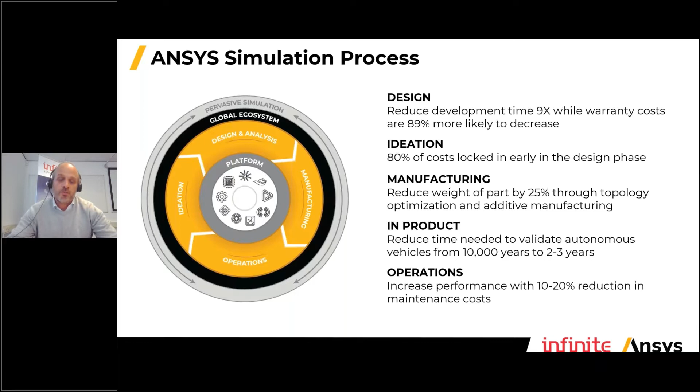Another nice trend to mention is at the very early stage of your product development process. Already in the conceptual phase, for instance, you can already start doing simulations. This is something that Ansys really pushes, to have a better understanding of what the results are at a very early stage of your product development. Most important in this whole approach is that we, as the Ansys partner in the Benelux, put your business goals in the center.

So how is this achieved? The setup of this platform of Ansys is shown here by the physics blocks. Most people in the industry know us for the fluids and structures simulation capabilities, but also on the electromagnetics, for instance.

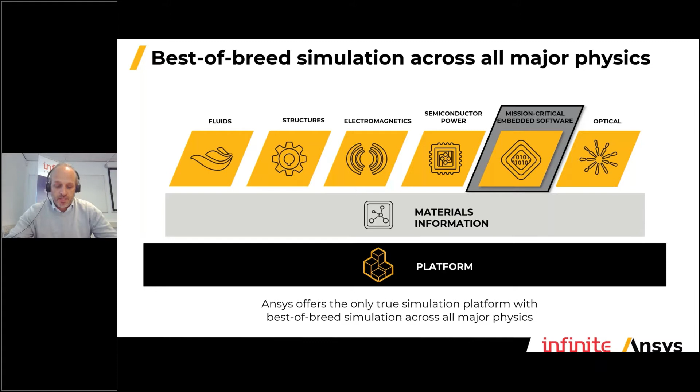One of the ones we're talking about today sits in the mission critical embedded software part. You see it highlighted here in the gray block. Within here, there is the Medini Analyze functionality, but we also have the SCADE functionality, which I'll emphasize in a minute.

So if we really talk about Ansys Medini, our colleagues from Ansys are going to talk about this in a minute and really take you in depth. Most important is that Ansys Medini Analyze streamlines your functional safety analysis across the entire system architecture, including electronics, down to your chip level. That's really important. Ansys Medini Analyze is a model-based integrated tool supporting safety analysis for safety critical electronic, but also electronic and software controlled systems.

It allows for consistent and efficient application of industry guidelines, specifically tailored for the industry, for various industries. I'm not going to go in detail, but this gives you an idea that Ansys Medini and the cybersecurity part can actually be used within these different industries with their different standards. Nikhil of Ansys will focus on this in a bit more detail in a minute.

So think about your business goals. What will happen if you're going to present your product? It's almost completely developed. But think about your business goals, like time to market, and the risk that you have within the complete development part.

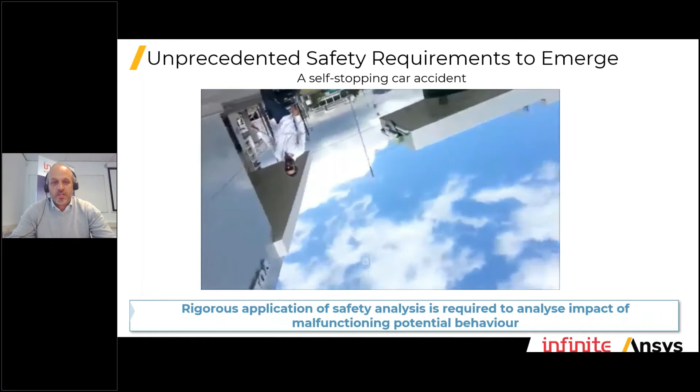Think about if something happens that you haven't seen before, like what you see in the screen here. That's a bit of an accident. So there's a huge impact within the team, of course, but also on your business development goals. This will throw you back and give you a huge delay to actually present your latest version of the product to the market.

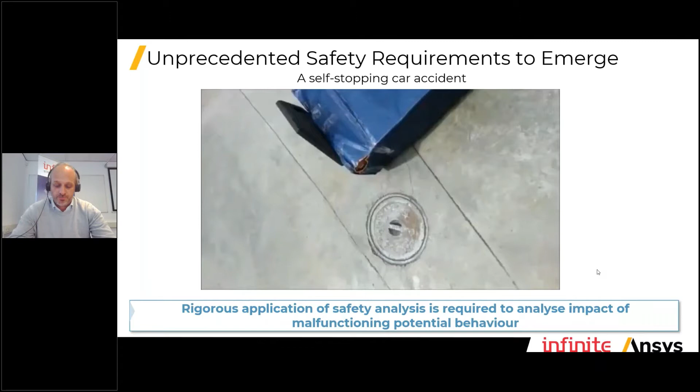Jeroen? Yeah, I'm a bit too fast, so just a second.

What I would like to show you at the end of the webinar is the top 10 of 2020. So be patient, I will show you how it looks, and there's a major shift going on. We don't have the information of 2021, but that will be available next year, of course.

Okay, one second Jeroen. Yes, please. Yes, I would like to hand over to Nikhil Kelkar.

He is the System Business Unit Global Channel Sales Manager, and he will talk about what functional safety and cybersecurity can actually do for your industry, like automotive, aerospace, and industry. Nikhil, it's up to you.

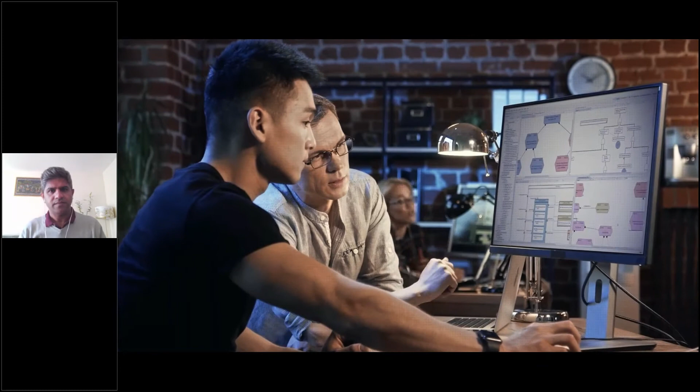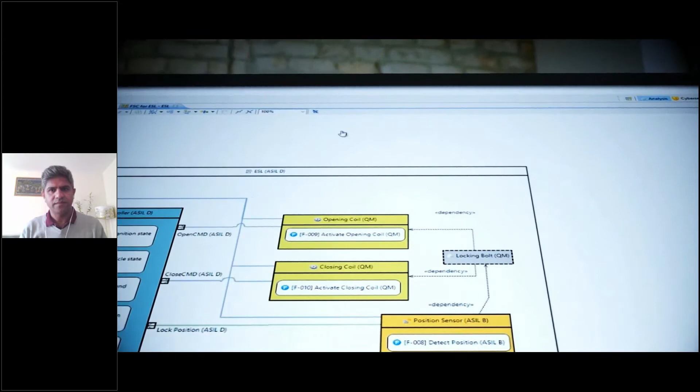Ansys Medini Analyze. For functional safety analysis, engineers across multiple industries trust Ansys Medini Analyze for analysis at the concept, system, software, hardware, and even chip levels. All of your key safety analysis methods, all in a single integrated tool.

Analyze different aspects of functional safety, define solutions, and ensure compliance to ISO 26262, IEC 61508, and others. To satisfy emerging safety standards, such as SOTIF and UL 4600, Ansys Medini Analyze identifies and addresses performance shortfalls that occur even in the absence of a system failure, so that design and performance both succeed in cases that go beyond functional safety analysis.

Complex electronics are also vulnerable to cyber attacks. Increased software and connectivity opens the door for hackers, who gain more opportunities to infiltrate systems. Ansys Medini Analyze addresses system-level security to uncover and eliminate your weak spots, so your entire electronics architecture remains impervious to outside attacks.

For leading electronic systems in automotive, aerospace, rail, and many more safety-critical industries, get ahead of the compliance curve. Streamline your analysis efforts. Accelerate time to market. And deliver unmatched safety and security with Ansys Medini Analyze.

All right, so let me just go ahead into the next page. So as we talked about in the video, it was clearly mentioned that whatever analysis that you're doing currently can happen in one platform altogether. And that is what we are going to talk more about.

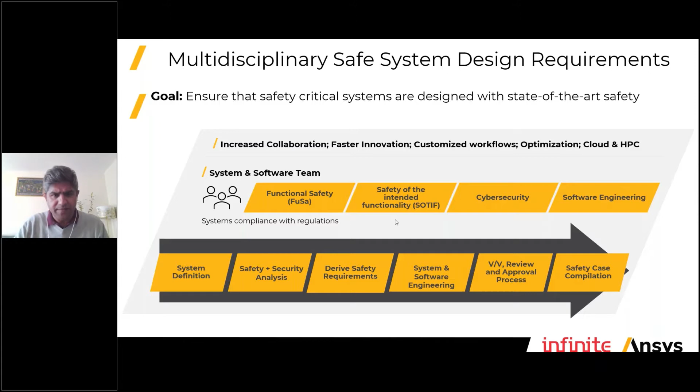Why functional safety? Currently, people are using point tools. Many customers are using Excel files, different products for doing their point analysis. Probably one customer is doing their HARA analysis into a different tool, and their FMEA analysis into another tool. However, because of that, there is a lot of manual workload on the customers, and also the traceability and the scalability becomes a big question mark.

So the customer goal usually becomes that they want to have a scalable and traceable software for doing their safety analysis with a lot of time saving, and are able to maintain and develop a supported solution. Ansys Medini provides a model-based approach wherein you can update your safety analysis after changing the system design or the system model, and it provides one platform for doing all your safety methodologies required by the safety standard.

Eventually, when you're using one platform at the same time, it saves a lot of time, because the reuse of work of the tool and also the guided safety management tool provided by Medini reduces a lot of time benefit for the customer. So eventually the customer comes out with a saving of up to 50% on their design flows and their model-based approach.

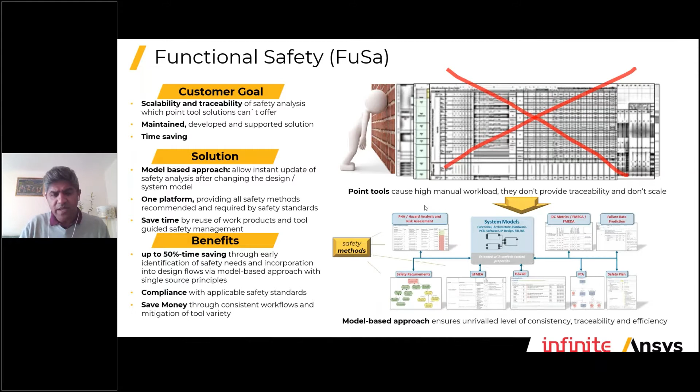Their system analyses are compliant to the safety standards that we provide, and eventually saving money for our customers. So that's where Ansys Medini will help our customers drive their functional safety analysis goals.

When you talk about software engineering, usually these analyses have to be implemented into the software engineering part, so that you can use those systems and design your software goals. In those scenarios, the customer needs to manage a lot of complexity with regards to the system software. And when you talk about automotive, they have to be compliant to ISO 26262 and AUTOSAR compliant.

In similar scenarios, when you're talking about other industry sectors, for example aerospace, these standards have to adhere to ARINC 661 or DO-178C, or the FACE standard, similarly for IEC 61508, and also eventually reducing their time to market. As I mentioned, with Ansys Medini's multidisciplinary system applications, you would be able to create automated code generation, and also verify the full model-based approach with no back-to-back testing.

So eventually saving a lot of time, confidence, and identifying the issues at a much better and faster stage that can be done by our customers. And there would be always a reduction in the cost of change. So these are the main reasons where customers look for software engineering with Ansys as well.

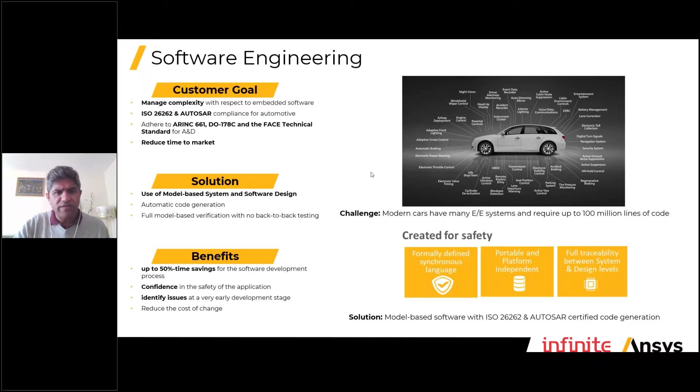When you talk about Ansys safety, we cater to multiple industries. Medini was predominantly a product resulting for ISO 26262 standard. Eventually, with a lot of development and customer support, we've been able to work into different industries. Currently, we support IEC 61508, ARP 4754A, MIL standards, ISO 21448, and the ISO 21434 standard for cybersecurity.

So if you're looking for a product collection, we have Ansys Medini Analyze, which is talking about the standard, complete standards. We also have a product for semiconductors, and Ansys Medini Analyze for cybersecurity is also part of our product collection.

So sorry about that. When we talk about functional safety standards, the generic standard which is derived for all other standards is IEC 61508, and from there functional safety requirements exist in each and every industry right now.

So if you're talking of electrical drives, the IEC standard is 61800-5-2, and Medini supports this standard. If you're looking into agricultural and forestry, where there are requirements for agricultural vehicles, ISO 25119 is a standard which is compliant for Medini as well. If you're coming from a medical devices industry, then you can do your Medini analysis for the IEC 60601 standard. So in a nutshell, we are able to support functional safety standards for multiple industries.

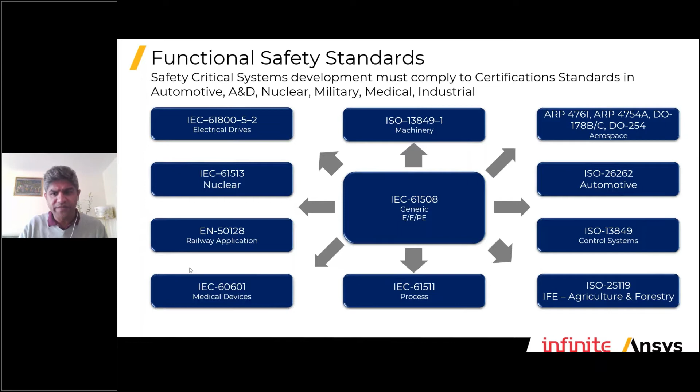And we can dig deeper with you guys if you have a specific standard that you want to work on, and we can look into this in detail. So when you're comparing - this slide was shared by Jeroen, and I want to get a bit deeper into it - we talk about how analysis can be compared across different standards and different domains.

So if you are working on ISO 26262, your risk graph, which is the HARA, the hazard and risk assessment, will be mentioned as HARA. But when you're talking into the ARP side, which is the aerospace domain, the same risk graph would be termed as FHA, and they would tie to the DAL standard, whereas in automotive it would tie to the ASIL standard.

Similarly, when you're talking about machineries, IEC 61508 or ISO 13849, this would come into the PHA standards, which talk about PL and SIL. Similarly, when we talk about FMEDA, it would relate to SPF. Here it talks about individual risk, and in IEC it would be talking about SFF.

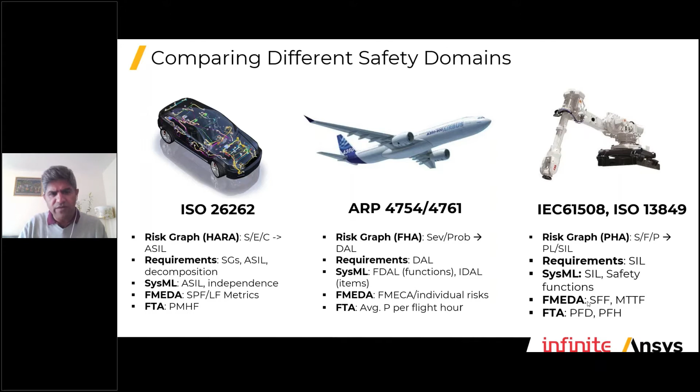So that is the comparison that we are going through, and we are able to answer our customers for analyzing into different industries.

I want to take you through an application example. Here I'm going to talk about in-vehicle systems, which is very close to the automotive side. However, it's going to answer a few of the questions that every customer is currently asking and wants answers for. So in this in-vehicle example, the first question my customers usually ask me is,

are all my safety analyses consistent and based on what's really implemented? That's one of the important questions. Then the second question that comes to their head is, what is the safety impact of malfunctions and failures in the systems and the components? And there are a few customers who also want to understand the impact on the semiconductor side of the overall vehicle or system safety. And they also want to look at what are the real world scenarios where there would be capabilities falling short.

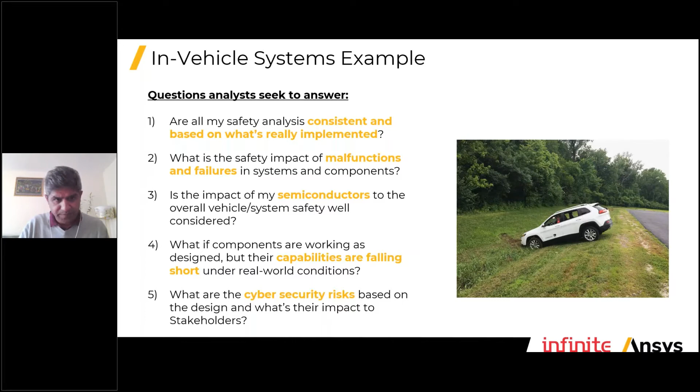And also the biggest topic right now is cybersecurity risk based on the design, so how it's going to impact our stakeholders. So to go much deeper into that...

To answer the first question, the customer is looking for what's really implemented, and for that the customer's goal is to have a multi-analysis methodology in a consistent manner, and to also have traceability and scalability of their safety analysis. And as I mentioned in my previous slides, Ansys's solution provides a model-based approach that will allow you instant update of your safety analysis even after changing the model design.

And it's also providing one platform, so you can do all your analysis starting from HARA, HAZOP, FMEA, FTA, and also your safety requirements. So it's a complete circle that we are able to cover with Medini Analyze, eventually reducing your time for product management. And the second question is usually, are our malfunctions and failures having an impact?

So to ensure that our electronic systems are providing consistent performance over time, and also how they can be maintained and developed into a supported solution, eventually reducing the time. The biggest aspect here becomes that if there are failures, there would be delays and time constraints.

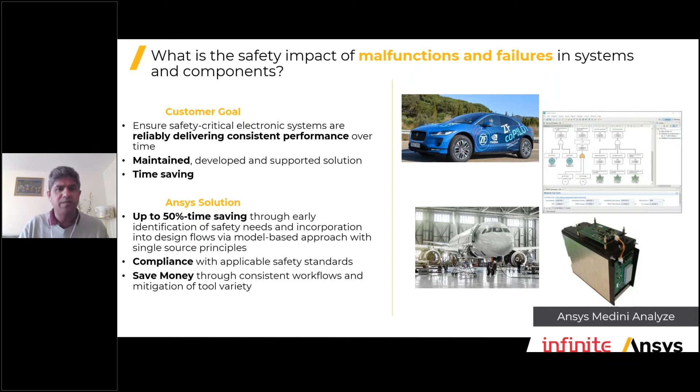As I mentioned, we allow up to 50% of time saving, and that's a customer number, through early identification of the safety needs, and incorporating those into your design flows via a model-based approach. We are compliant to the safety standards, talking from ISO to ARP side. The main result and benefit would be saving money with a consistent workflow, mitigating the tool variety. This is one of the reasons customers like ZF and Lithium Balance are using Medini.

There are customers who want to see an impact at the chip level, into the semiconductor design. In that scenario, the customer maps the semiconductor design to the functions that they support within the vehicle, which is of key importance. Eventually the semiconductor should perform flawlessly and have outstanding passenger safety. This is one of the requirements that comes across when talking at a chip level.

Our solution for that is to provide an analysis that can identify potential failure modes, and verify the functional safety at the chip level, at the semiconductor component level, and mitigate the impact of design weaknesses on day-to-day safe performance, overall providing a system analysis of the semiconductor side integrated in the car or in the system.

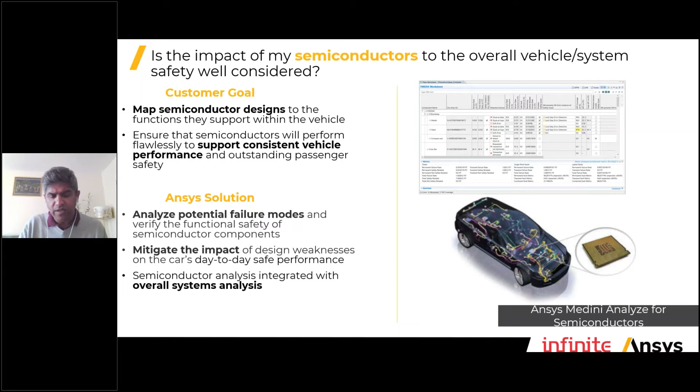There are also real-world scenarios which are a threat, and currently, as we move towards autonomy, we want those topics covered and considered when you talk about SOTIF, which is a bigger requirement for automotive currently. How we can identify those shortfalls and also mitigate those hazards in a nominal system for automated vehicles or for the sensors, in case.

It should also comply to the standard, which is still in the process of being standardized. So there is still time for us to do this, and Ansys currently is providing a solution that is able to do systematic identification of the SOTIF risk, as well as provide design limitations and triggering conditions. There is an efficient workflow that can be done on SOTIF and functional safety in a common environment.

We are trying to be leaders in complying with safety standards here when it comes to sensor deficiencies in adverse weathers, or deficiencies in driver performance. This is where Ansys Medini comes into picture as well.

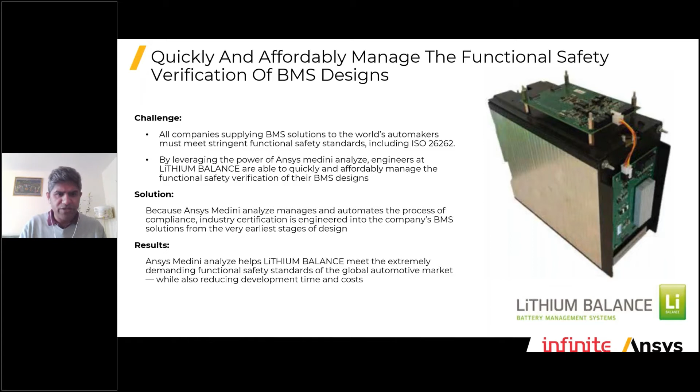A bit more detail about what Lithium Balance did for their BMS design: their challenge was that all companies supplying BMS solutions to world automakers have to be stringent toward functional safety standards, including ISO 26262. By leveraging Ansys Medini Analyze, Lithium Balance was able to quickly and affordably manage the verification of their BMS designs. This helped them meet extreme demands of functional safety standards required by the global automotive market, while also reducing development time and cost.

Similarly with ZF, I want to talk about cybersecurity. ZF uses our product for functional safety as well as cybersecurity analysis. Their challenge was to provide innovation and efficiency in their embedded system for the verification process. We provided the functional safety tool, and they were able to deliver ISO 26262 work products, reducing their functional safety analysis time by up to 50%. Currently they are applying cybersecurity analysis to their ADAS project, which is an ongoing process.

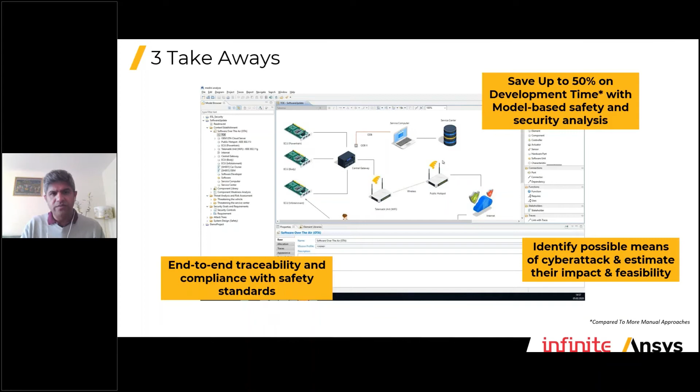The last three points on my slide are the takeaways for customers using Ansys. First, they get an end-to-end product solution that is easily traceable and compliant with safety standards. Second, it provides up to 50% reduction in development time through a model-based safety analytical method. Third, it helps customers identify cyber attacks and estimate their impact and feasibility in the long run. That's my final slide.

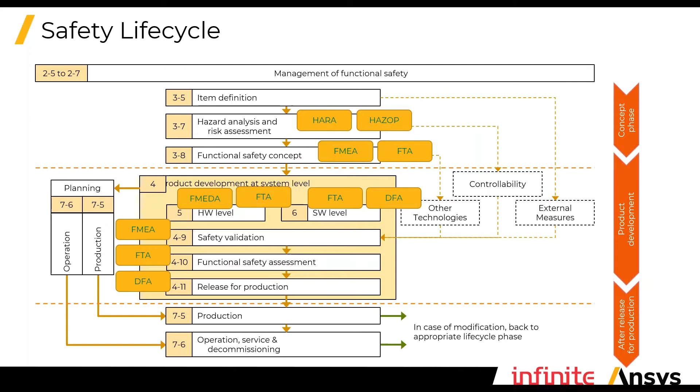As we mentioned, according to the ISO 26262, we have in Medini different work products. That means you don't need to change the tool. We have a work product or package to do the driving situation, hazard analysis and risk assessment, safety goal and safety requirement, functional safety concept and technical safety concept, and for the validation parts, we do support the FMEA, FMECA, for railway, industrial and aerospace, FMEDA, and the output of the FMEDA for automotive, where we need to calculate the single point fault and latent point fault. Of course, qualitative and quantitative fault tree analysis that we can support also in Medini, and dependent failure analysis that we can also support.

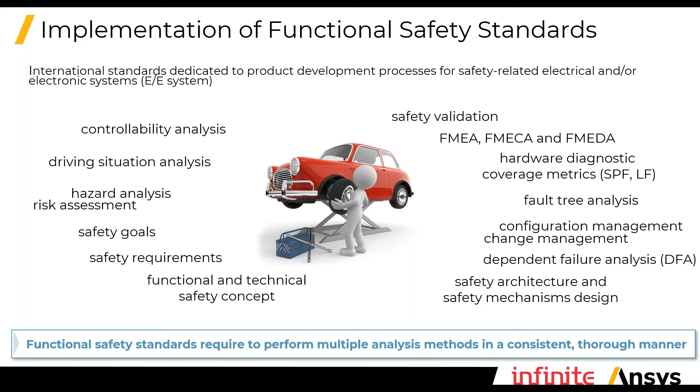A short demo how to create a new project here.

So according to ISO 26262, part 3, section 5, we need to create the item. So here in this case, I'm in Medini. I will go to create a new project. I will give a name to this project. And as you can see, we have different templates for different sectors where you can select the specific template according to your needs.

And as you can see here, as we choose the ISO 26262 template, here we have the different packages. These packages are according to the ISO 26262 V cycle, where we have the item definition, hazard analysis and risk assessment, the system design, where we can create the architecture directly in Medini, or we can import the architecture from an external tool. And for the safety analysis, where we can do the FMEA analysis, qualitative and quantitative analysis, and FMEDA on the package of diagnostic coverage.

Of course, this template is a proposal from our side according to the ISO or according to different standards. If you want to customize these packages according to your needs, it's possible. For example, in your case, you don't want to use item definition, but maybe project definition. You can, in Medini, right-click and rename a package. Or if you have any additional packages, you can also add these packages directly inside Medini.

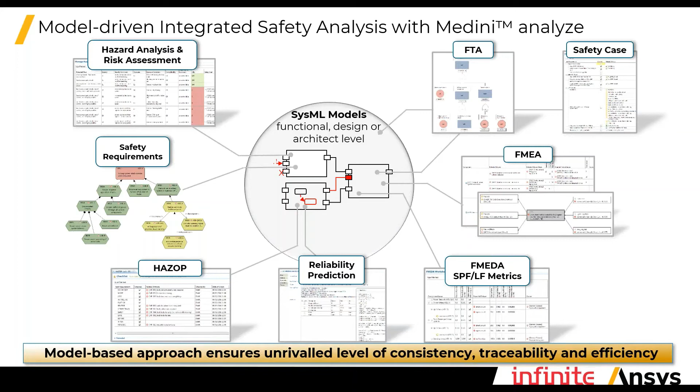You need to change directly in the architecture, and then the changes will be propagated automatically. It's a kind of SolidWorks: if you change the main view, the changes will be propagated automatically.

A short demo of the automatic propagation of changes in Medini. For example, I'm going to open the FMEA, the technical safety concept FMEA. As you can see, we have a column for function or component, and I want to see where this component is located in my architecture. So with right-click, Medini shows me where this component is in my architecture.

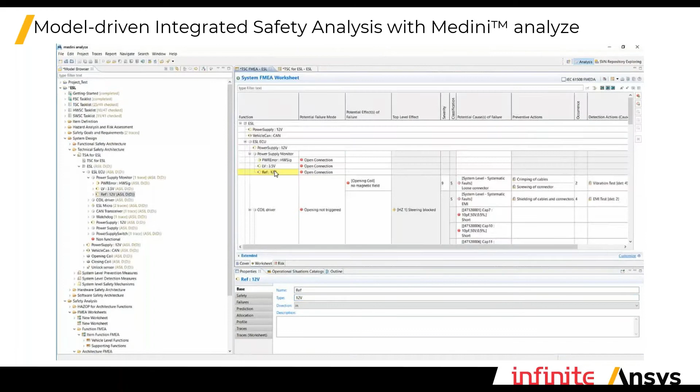As you can see, the type is 5 volt, and I want to change it to 12 volt. If I come back to the FMEA, as you can see, the change was propagated automatically.

Later on, maybe I want to delete this component. If I delete it, Medini pops up a message: be careful, if you delete this component, you're going to delete also the line that you have in the FMEA sheet.

As you can see, this architecture was created directly inside Medini by using the SysML language 1.4. On the right, you have the palette, and from this palette you can easily drag and drop and create your architecture.

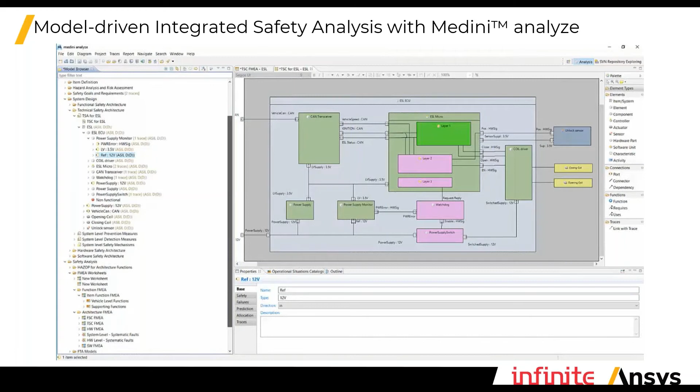Same for requirement management. We have a lot of integration with requirement tools: JAMA, DOORS Classic, DOORS Next Generation, PTC Integrity, ReqIF, Polarion, and Codebeamer. That means you can easily import your requirements directly inside Medini and then allocate them according to the ISO, for example allocating your requirement to your architecture, function, or component. You also have the possibility, when doing your safety analysis, to create new requirements.

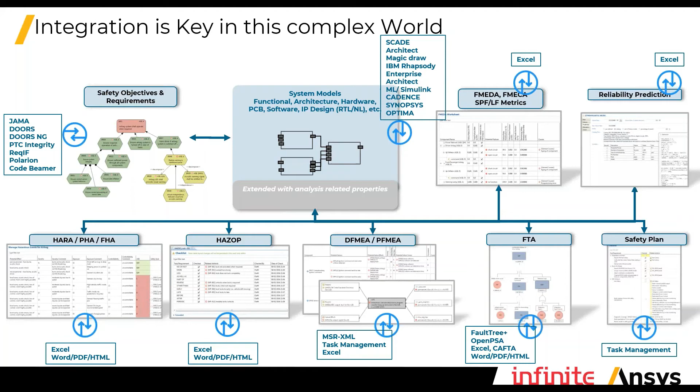Let's move on to the cybersecurity part. How we deal with cybersecurity is the same as we have for safety, so for cybersecurity we are also model-based. You need your architecture, of course. You can have a separate architecture, or reuse the same architecture from the safety side, and do your cybersecurity analysis on it. Then from this architecture, you're going to do the cybersecurity analysis: attack trees, damage scenario, threat analysis, and then define security requirements.

The integration that we have for the safety part is also valid for cybersecurity. If you have a cybersecurity requirement in an external tool like JAMA, DOORS, Classic, or NG, you can import it into Medini, and export requirements from Medini back to the external tool. Same for the model: you can import it from external tools like Magic Draw, Rhapsody, Enterprise Architect, etc. You can also generate reports in Excel, Word, PDF, or HTML format for the cybersecurity part.

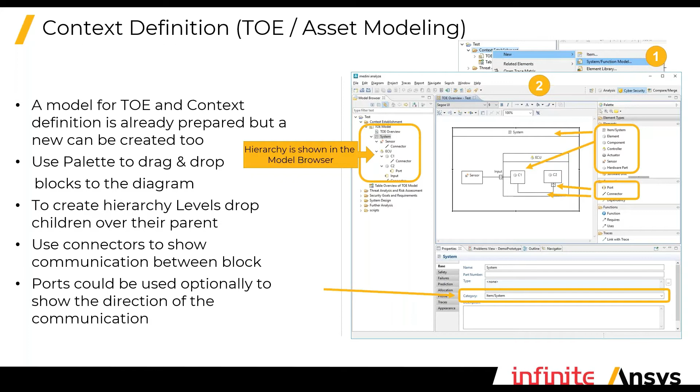If we go deeper, once we've created a project, we have to define the architecture. In the context establishment, we need to define the architecture. From the palette, you can easily drag and drop to create exactly what you need for the architecture, or you can import the architecture for the cybersecurity part from an external tool.

When you have the architecture, for each subsystem or component, you have the possibility to assign assets. You go into the security part and select assets. These are the security attributes we propose inside Medini for the moment: confidentiality, integrity, availability, etc., which you can select for a specific component. These cybersecurity attributes are customizable - you can easily customize them for aerospace, railway, or automotive.

When you have your architecture, you define the assets, then from your architecture you can generate the table for the threats, where you define them. Let's go deeper into how the threats table looks: you have the ID of the component, the name of the component, the assets, the categories, and according to ISO, five parameters where you define the risk level - equipment, expertise, knowledge, window of opportunity. You can easily define these parameters and determine the risk level.

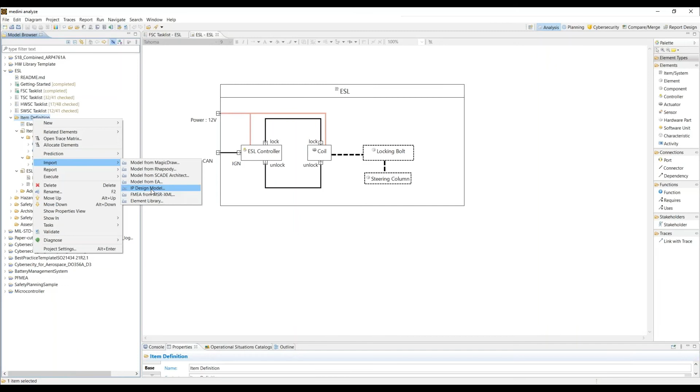Magic Draw, Rhapsody, Enterprise Architect, and from IP design model. Of course, these are for tier 2, for the microcontroller, etc., for those who want to import also their failure rates inside Medini. So we have also this possibility.

You have your abstract architecture, and then according to ISO, you're finished with the item definition part. Now you have to jump into the hazard analysis and risk assessment.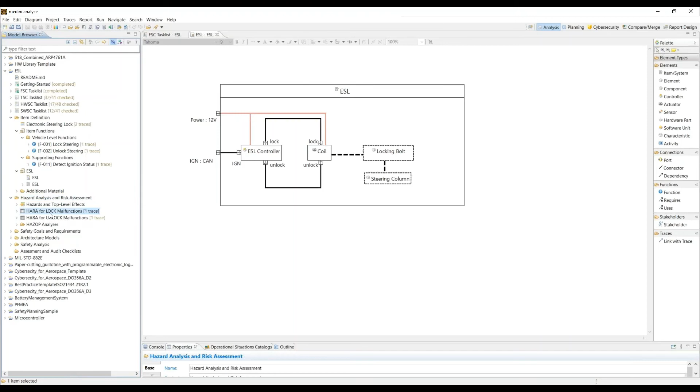If you want to create a new hazard, right click on the package and create a new hazard. In my case, I'm not going to create a hazard because I already have one here, the hazard analysis and risk assessment table. So I can double click and see the table that I have for the hazard analysis and risk assessment.

Of course, the input that we need from the item definition part is the functions, and once we have the functions we need to define the malfunctions. In Medini, we support the HAZOP methodology, or guide word analysis, where you can define your malfunctions according to the keywords. For example, if I open this element, which is the functions, these functions are coming from the item definition.

I can easily drag and drop this function, for example, here inside the item, and then create an empty line. According to HAZOP methodology, we have some guide words where you can easily define your malfunctions. For example, lock, strong, no, or not. So the malfunction is lock not activated when required, or lock too strong. Using this guide word analysis, we can easily define our malfunction.

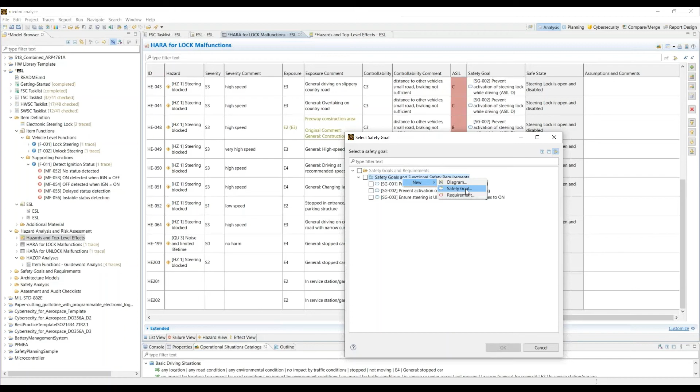If you have a list of safety goals, you can select from this list to put into the specific line of the HARA. Otherwise, you can also create a new safety goal directly inside Medini if it's not already in the list, for this specific line of the HARA.

Of course, you have your HARA here, and then the safety goal, and the safety goal is the input for the functional safety concept. So we have here a package for the functional safety concept. As you can see, we have a list of requirements, but before having all these functional requirements, the input we need is the functional architecture.

So in the architecture model, we go deeper down. At the item definition, we have the abstract level, and here we have the functional architecture. You have to create this functional architecture inside Medini, or import it. When you're done with the functional architecture, you can easily right click and generate a new FMEA worksheet.

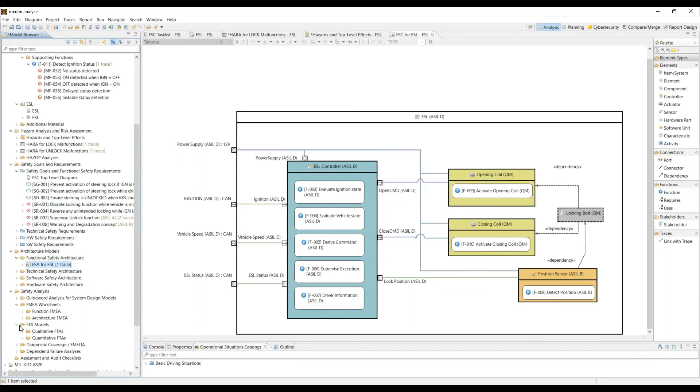You can easily generate a worksheet here for your functional architecture. I'm not going to create one because I already have a functional FMEA here for the functional safety concept FMEA. According to the new standard, if you're using it, you have to select AIAG VDA.

It depends. If you want to calculate the risk priority number, select these columns: action priority according to the new standard, supplementary FMEA for monitoring and system response. If you come back to your FMEA worksheet, you can see we have the complete FMEA table, and all these component functions come from our architecture. Later on, each engineer needs to define the potential failure effects at the functional safety concept level.

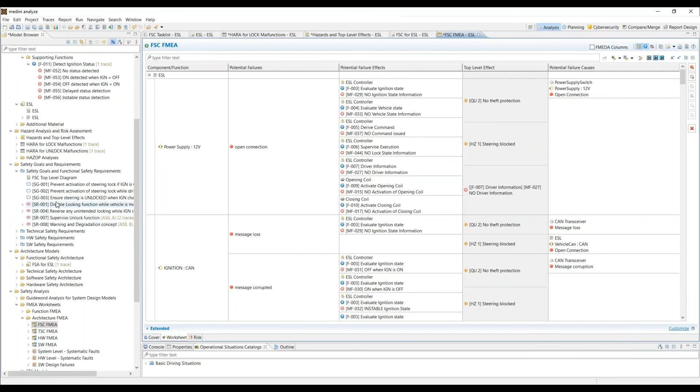Later on, if we go deeper down into the technical safety architecture, we are going to create a deep down component architecture. Here in Medini, you have the possibility to create this technical architecture, and when you're finished, right click and derive a new FMEA worksheet for the technical one.

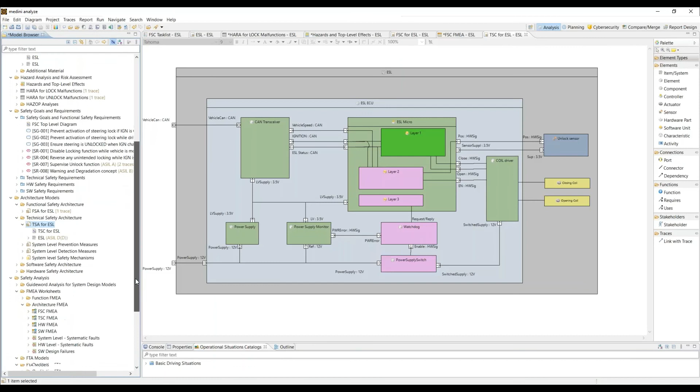So what does it look like? The technical safety concept FMEA. Again, in the worksheet, you can see we are going deeper down. In this case, you have the name of component, subcomponent, etc. You have to define the failure modes here, failure effects, and then according to the new standard or the previous standard, you have to define the detection action and prevention action here, and then you have the action priority, which is calculated automatically.

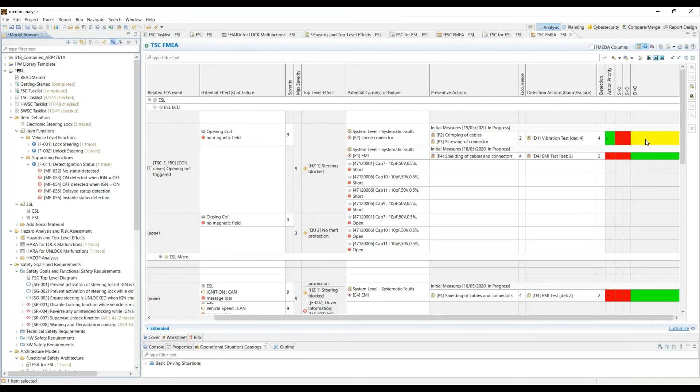Abdul, I have to interrupt you because we are running out of time a bit, and we also have quite some questions already in the chat box. So I would suggest that we move on to the next part and then go to the questions. Is that okay with you? Yes, okay, very good. Yeah, we can go because the more important thing was the technical one. I'm done.

That's great. Thanks, sorry to interrupt you, but we have some questions in the chat box which we'd also like to answer for the audience. But first, let me summarize what we have seen so far.

So by giving you the overview by Nikhil and the demo by Abdul, the way I like to summarize this is that we can actually help you. We can have a look at all your different goals, whether it's more strategic, like from the compliance side, communication, collaboration, or if you're focusing on a more technical role, we can help you out there too. We don't just do that with technology and training, but we can also organize a workshop, so we can sit together with the different disciplines and start having the conversation to find out what is the best solution for your functional safety and cybersecurity challenges.

And also on the business or economical goals, with the technology available today on Medini Analyze, we can also have a higher goal to reduce the time that you spend, especially on the cost side, which can actually be reduced by 57%, and you will have your products quicker available to launch in the market.